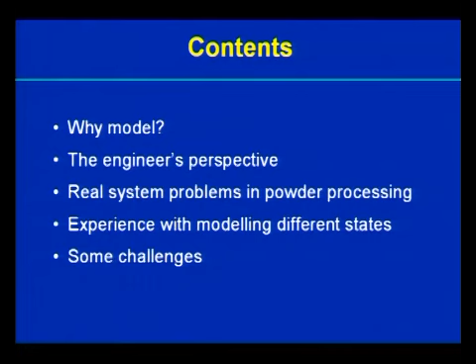Right. Contents of my presentation: first I'll talk about why we want to model, what the engineer's perspective is on that, some real system problems in industrial powder processing, which is what I'm talking about, some experience we have with modeling different states, some challenges, and a special offer at the end.

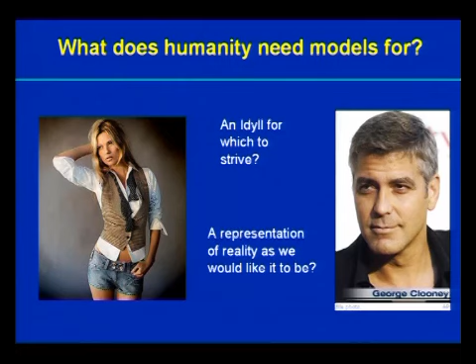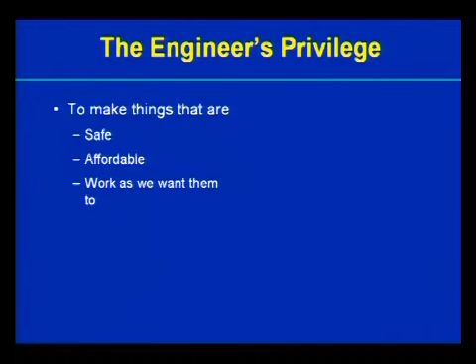So, what does humanity need models for? Maybe there are all sorts of reasons why we might want models. Is it an idyll for which to strive? Is it maybe a representation of reality as we would like it to be, or maybe just as we can understand it? The engineer's privilege, of course, is to make things.

And we want to make things that are safe, things that are affordable, and things that work as we want them to work. The other side of that is if our designs don't work, we're likely to lose our reputation and with it our livelihood. And if people have paid money and built things that don't work to our designs, we may be sued. And if those things fall on people's heads, we may go to prison. So we have a particular perspective on models.

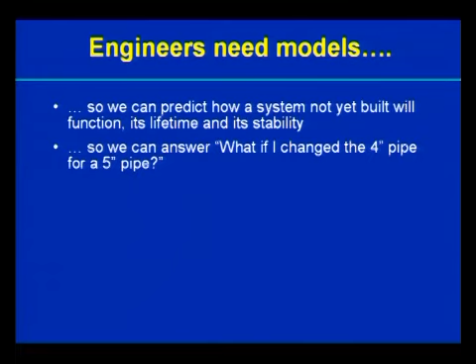Engineers need models so that we can predict how a system will work when we are going to build it: its function, its lifetime, its stability, but also to answer those what-if questions. What if I change this size pipe for that size pipe? What if I make the hopper angle this instead of this? We need models to answer those kinds of questions.

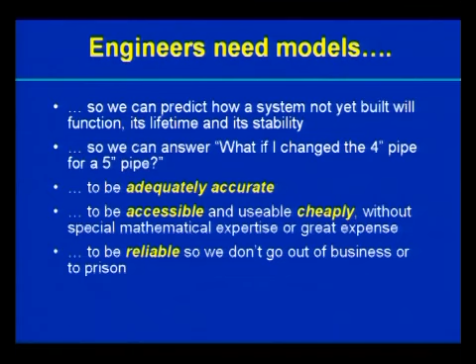We need our models to be adequately accurate, not necessarily absolutely, but to get us to the right solution. We need them to be accessible, usable cheaply, without special mathematical expertise or great expense. Engineers are not frightened of a bit of mathematics. We can cope with a few differential equations, but once we start to see curly D's, we start to break out in a sweat.

We need our models to be reliable for obvious reasons, and we also want our models to be validated to give us some confidence. Generally, our order of preference in using models: analytical models based on schoolroom physics is ideal. We can understand those, we can use them, we're confident about them. Can't solve many problems with those, though, unfortunately.

So in many cases, we use an analytical model that's based on a simplified physical model, and then we empirically calibrate it. An awful lot of engineering is based on this approach - the Fanning or Darcy expression for friction factors from the Moody diagram. And if we have to, we'll do material characterization tests to get those calibrations.

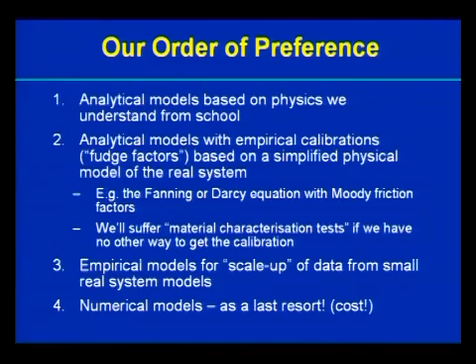If we can't do that, then we may be stuck with, as we are in many situations, empirical models for scale-up. We do a small-scale experiment, and then we have some sort of scaling rules to predict what's going to happen in the real system. Numerical models, by and large, are a last resort for us because of the cost and time scale involved. We'll only use them if there's nothing else, or if they give us a significant advantage to do something we can't do any other way, such as finite element modeling, which is widely accepted now.

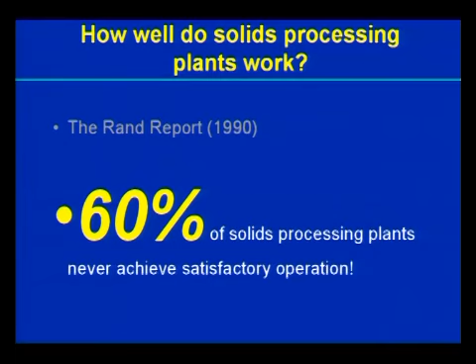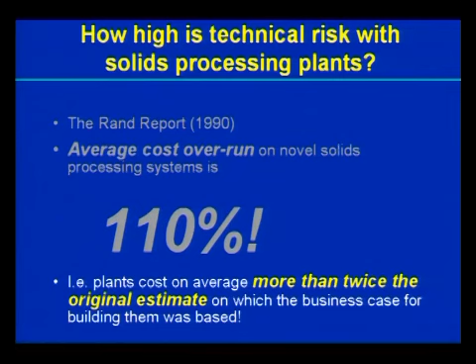Just turning back to what one or two other speakers have mentioned, how well do solids processing plants work? A report done a few years ago showed that 60% of solids processing systems never achieve the throughput and performance they're supposed to. If you look at the technical risk and the cost overruns, the average cost overrun is over 100%. So these systems cost more than twice the estimate on which the business case for investment was made. That's a pretty bad track record, I think you'll agree.

To be fair, quite a lot of that is because many people in the industry don't use the available models that exist. But it's also partly because our models aren't fully adequate in many instances. The kinds of things we finish up with are structural failures on silos, failures to discharge, and the inevitable outbreak of hammer rash, as it's popularly known, on hoppers and silos. This was taken on a pharmaceutical plant, and this piece of stainless steel pipe, just out of shot, has a number written on it - it's entered in the plant inventory log as the official piece of stainless steel pipe with which to beat the hopper.

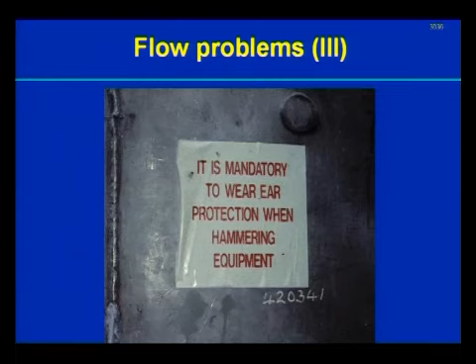Material going through there is worth more than £1,000 a kilo. That was on the same plant. It was supposed to be a 24-hour-a-day plant, but they couldn't work through the night because the noise of people hammering silos kept residents awake on the adjacent housing estate.

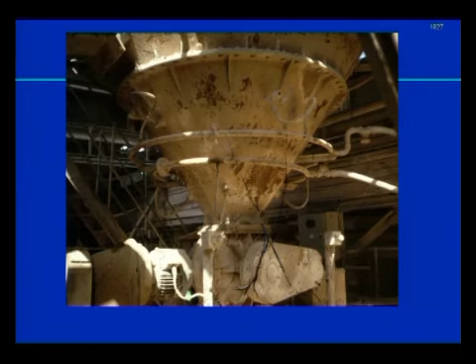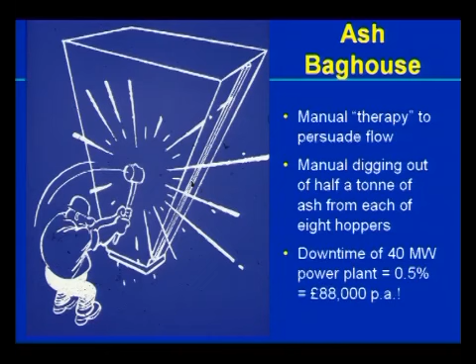And of course, people, apart from hammering, use aeration and all sorts of other things. On this hopper, they've even put valves up on the top, so when they get a blockage, they can get somebody round with an air lance to give the hopper an enema, to get it moving.

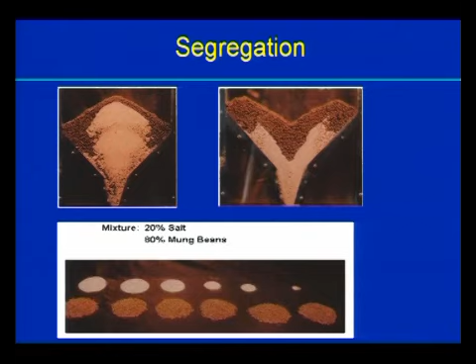There's an example: one baghouse on a small power station. Cleaning costs them £88,000 a year in downtime.

Segregation, another common problem. You put material in a hopper, and when you discharge it, it comes out no longer mixed. Caking is another problem, material going hard. So that's just a few basic problems, by no means a thorough tour, but just a few illustrations.

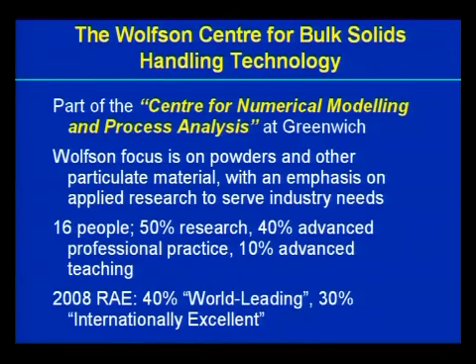Just a little bit about the Wolfson Centre, so you get an idea of where we're coming from. The key point is that within my team we occupy a fairly privileged position, in that if you divide up our man hours, we spend about 50% of our time on research and most of the rest on advanced professional practice. So we get a lot of time to use the models we're developing and also models from other people. That's quite a privileged position which we appreciate.

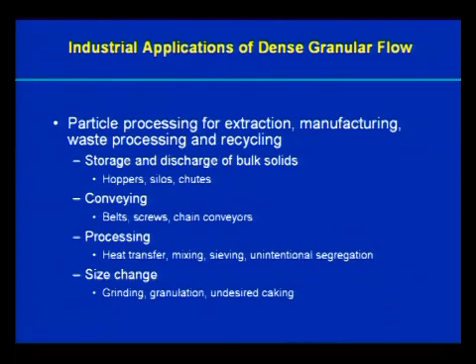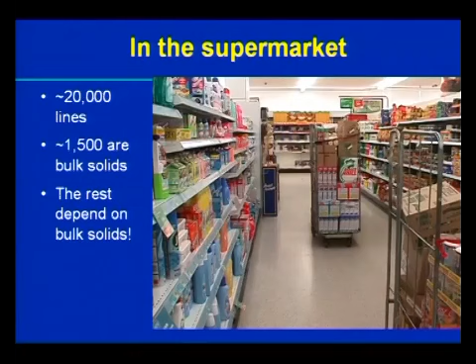Now, a few industrial applications of dense granular flow. Particle processing for extraction, manufacturing, and all the rest of it - storage, conveying, processing, mixing, size change, all of these kinds of things. A lot of people have talked about the importance of bulk solids, particulates, or granular materials, and the name tends to depend on what discipline you're working in, but the implication is the same.

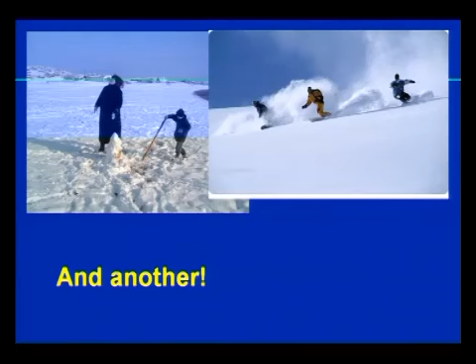So I'm going to do a quick tour of some techniques we've had experience using for predicting dense and intermediate granular flows. Although this conference is supposedly about dense granular flow, we've actually talked much more, I think, about the intermediate - and in many ways that's where there are more challenges.

Now, I'm going to talk about a lot of different techniques. Because of time, I'm not able to reference or credit all of them. Some of these techniques are what we've developed in our group, some we've developed in collaboration with other groups, and some we've just brought in from others as well. But if anybody wants references, I can give you piles of them.

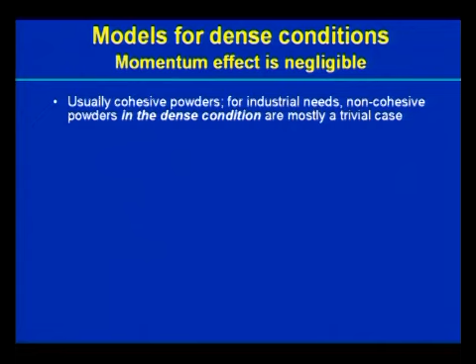So, models for dense conditions, where obviously, as we've heard, momentum effect is negligible. In most industrial applications, we're talking here of cohesive powders. Non-cohesive powders in the dense condition, industrially, is mostly a trivial case - in other conditions not so, but in the dense condition it's non-fluidized cohesive powders, and it's a statics-driven problem.

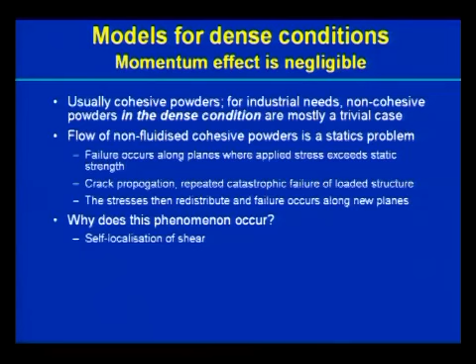Failure occurs along planes where applied stress exceeds static strength - crack propagation, repeated catastrophic failure of a loaded structure, if you like. The stresses redistribute, and failure occurs along new planes. Self-localization of shear, as we've heard a lot about, is a big part of this, and that's one of the reasons why that happens. It's not the only reason, but it's a big contributor.

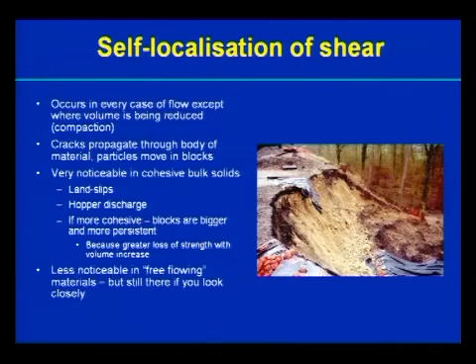And of course, this is a two-stage process. A cohesive structure is created by material being put, say, into a hopper. Then when you open the valve at the bottom, you hopefully get failure because of the change in load conditions. So we need to always be aware that flow of cohesive powders in the dense state is a two-stage process. Self-localization of shear - you see this everywhere in the flow of cohesive materials like this.

Techniques to solve these dense, slow flow problems: if you can describe the geometry mathematically, such as flow patterns in hoppers, stability of embankments, and a number of other things, then you can do very well with analytical models based on statics. One advantage is that you can feed in fairly complex constitutive models for plasticity and account for cohesion, friction, volume change, and other factors.

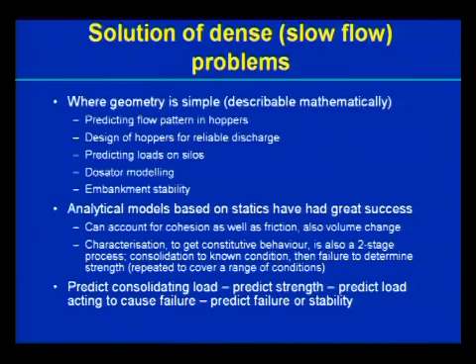But you have to characterize the powder to get that constitutive behavior, and that's a two-stage process: you consolidate the powder, then fail it. That's what we do with shear cells. You predict the consolidating load in the system, the strength that lends to the system, the load acting to cause failure, and then you can predict failure or stability.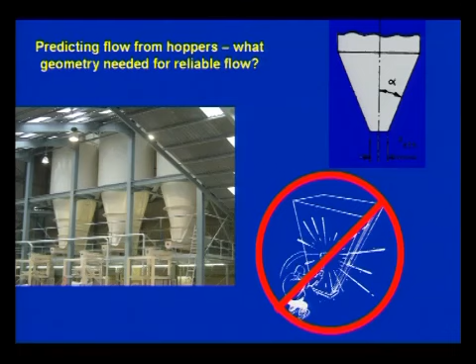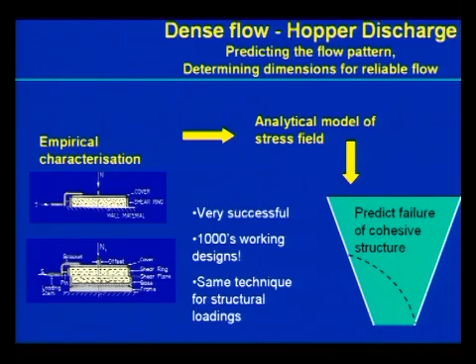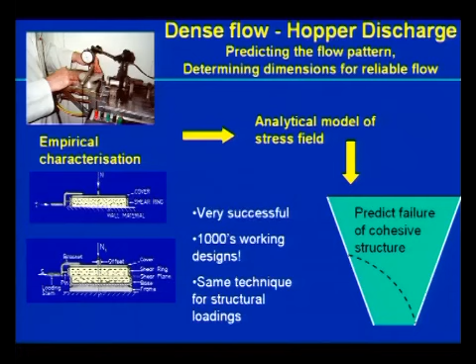What geometry do you need in a hopper to avoid this? These are some hoppers for cohesive clay that we've designed. No hammer rash on them, notice, because they've been designed using well-established models predicting the flow pattern inside hoppers. So the principle is: empirical characterization, analytical model, predict stability or failure. Very successful—thousands of working designs. It also works for structural loadings on bins and other constraining walls.

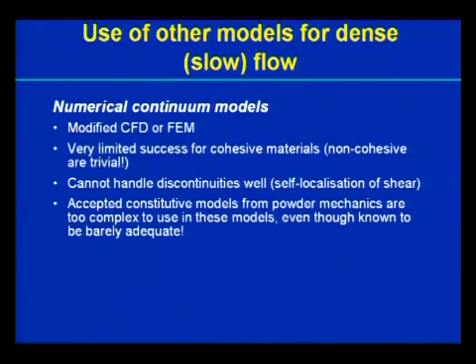Other models for dense or slow flow we've tried are numerical continuum models, modified CFD or FEM type models. Broadly, for cohesive materials, these have had limited success in quantitative predictions. One main problem is they don't deal well with the severe self-localization of shear and hence discontinuities—that's a real problem. The other issue is our constitutive physics, which we understand reasonably well, is too complicated to put into these models; they become too hard to solve.

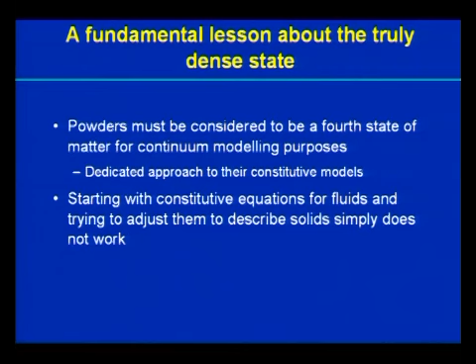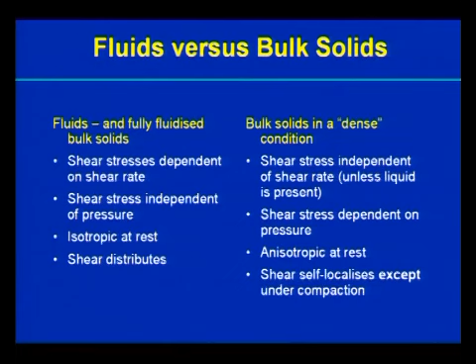The simpler constitutive models just are not sophisticated enough. For example, you can't easily predict core flow channel boundaries, a problem we've been looking at for a number of years. So here are a couple of fundamental lessons about the truly dense state: you've got to consider powders as a state of matter in itself, separate from liquid, solid, or gas, and you've got to have a dedicated approach to their constitutive models. If you try to start with a system based on modelling liquids and frig it to work, it just doesn't.

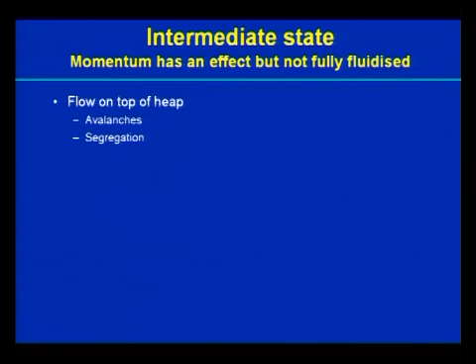This is because of the comparison between the properties of fluids or fluidized bulk solids and the properties of bulk solids in a dense condition.

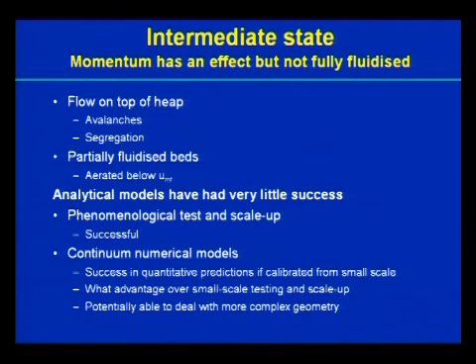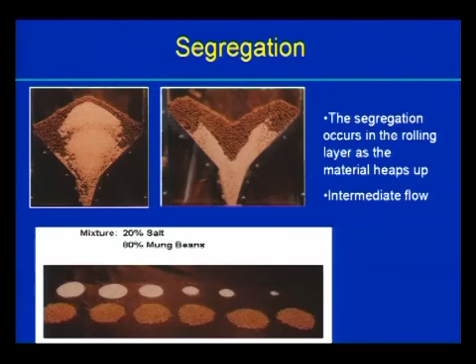Let's look briefly at the intermediate state where momentum has an effect but the material is not fully fluidized—flow on top of a heap as you make it, avalanches, segregation, partially fluidized beds. Analytical models: not much success with these. Phenomenological test and scale-up is where we're generally at, and that's broadly pretty successful. Continuum numerical models: some success if you calibrate them from the small scale, but then what's the advantage over small-scale testing and scale-up?

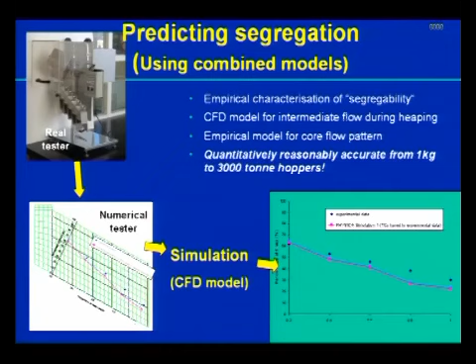Segregation in the intermediate flow regime: predicting segregation again using these combined models, a result of a collaboration between our group and the group at Surrey. A segregation tester actually measures segregation in a powder as it's handled, a numerical version of that reverse-engineers it to extract the transport coefficients, and then those coefficients are used to predict what's going to happen in a full-scale silo. Works very well.

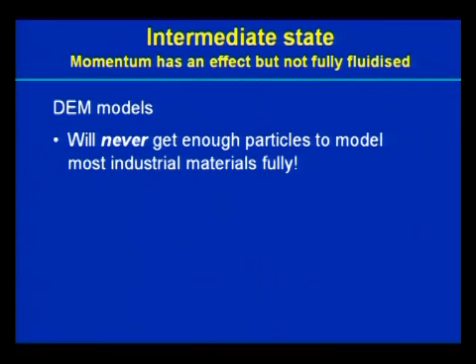Intermediate states, where momentum has an effect but it's not fully fluidized: DEM models—basically you'll never get enough particles because of the dispersion and the fact that materials are polydisperse. If you've got a wide distribution of sizes, like in most real materials, say a 100-to-1 size range between the 5th and 95th percentile, that means the mass ratio between those particles is a million to one. So if you want 1,000 of the large particles, you'd need a billion of the small ones, plus all the ones in the middle.

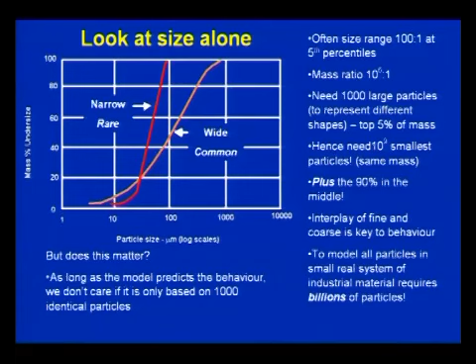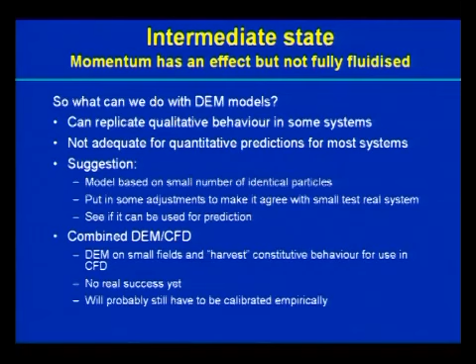It's just not on. But actually, as engineers, we don't care about physical rigor. If the model predicts the behavior properly—even if it's only based on 1,000 identical particles but calibrated somehow—that's okay. So a simpler model with calibration, we're happy with, though we haven't been able to get there yet. Likewise, combining DEM and CFD, running DEM on a small field to harvest constitutive behavior—no real success yet, but we might get there one day.

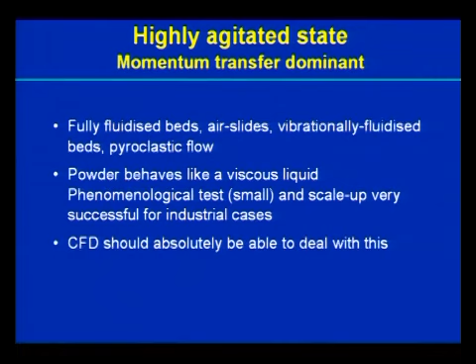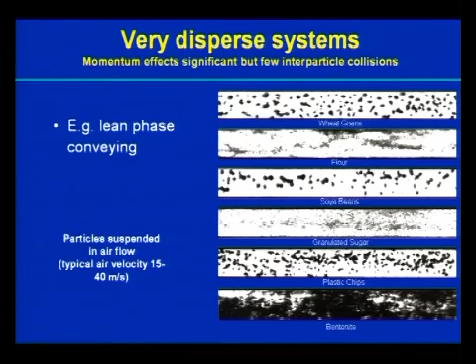Looking at the highly agitated state where momentum transfer is dominant, such as fluidized beds, powder behaves like a viscous liquid, so you'd expect CFD should deal with that extremely well—not sure about DEM there. Very dispersed systems, such as lean phase conveying: these are pictures taken in a sight glass in our lab, and you can see the kind of dispersity you've got there.

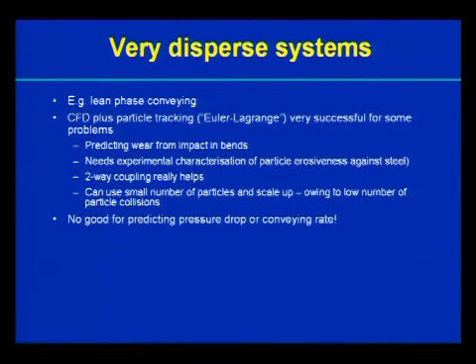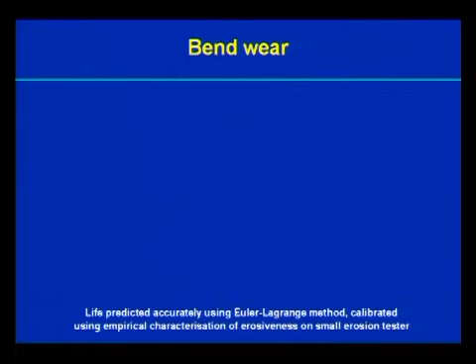CFD and particle tracking, an Euler-Lagrange type approach, has worked very well for some problems, like predicting wear on the inside of bends. But we've never found it to be any good for predicting pressure drop or conveying rate. The only way to do that is to do a test at a small industrial scale and scale up.

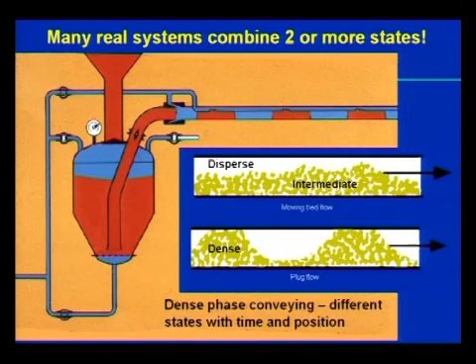So there's bend wear. Dense phase conveying systems illustrate a problem with many real systems: they combine more than one state. In a dense phase system where you've got slug flow, you may have intermediate and dispersed phase. You may have dense conditions in slugs, which then at bends rearrange in a fluid-like condition. Very difficult to try and tie all those models together.

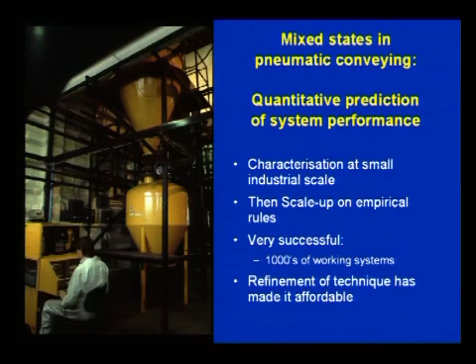So there's a test rig that we use to test at the small industrial scale. What we've done is to try and refine the technique to make the characterization testing as cheap and as quick as reasonably possible. So mixed state systems, as I said.

Crossover is too expensive to model. Here's a few challenges, some of which might be doable. I've tried to keep out of these the things that I think are probably too hard.

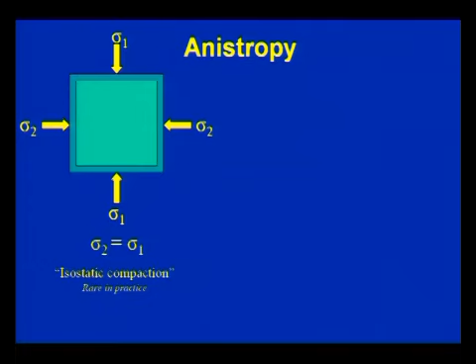Anisotropy in powders. Take a block of powder, apply a stress all the way round. If sigma 1 equals sigma 2, what we call isostatic compaction, you will get the same strength in all directions. If you cut that on any plane, you get the same strength.

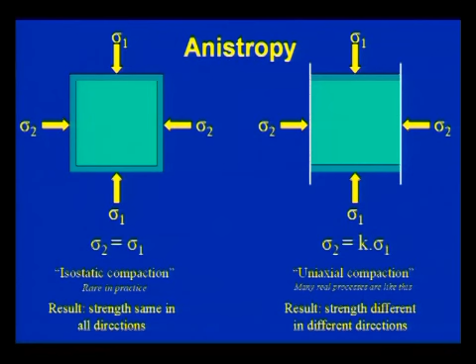But actually, that's rare in practice. That's not what generally happens. Most real processes, powder tends to be constrained. What you get is something more like the uniaxial compaction, something like Oscar was showing you on Tuesday with his K-meter. The problem is if you cut that at different angles, you get different strengths.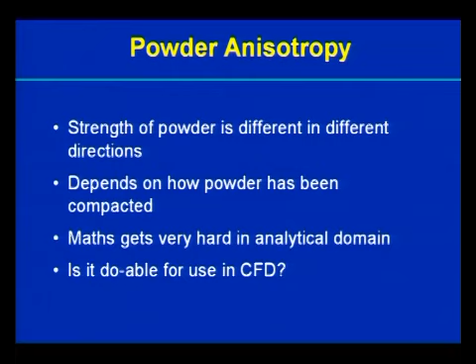And we've got no real way of even describing that, let alone being able to use it adequately. So powder anisotropy depends on how the powder's been compacted. The maths get hard. Would we be able to develop something in the way of a constitutive framework that would capture that we could use in CFD?

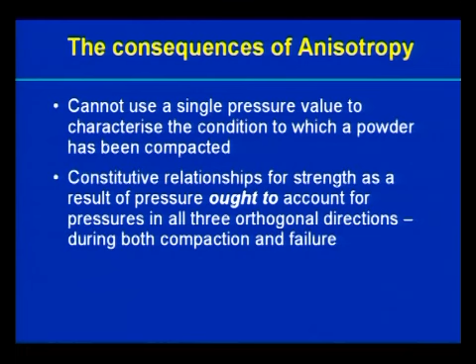Until we can, we're not going to be able to use CFD effectively for the really dense phase, in my view. This means you cannot use a single pressure value to characterize the condition to which a powder's been compacted. You've got to account for pressures in different directions, and of course powder stores its history. This is another way in which powder stores its history.

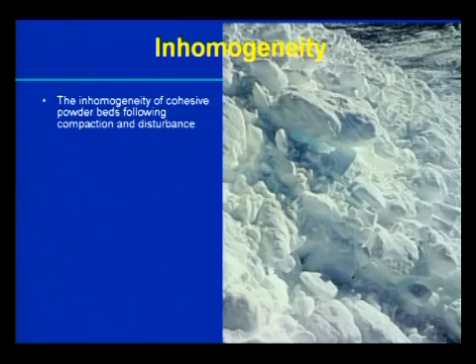In homogeneity, when you've got cohesive powders, this is the result of an avalanche. Lots of little snow particles, they've settled, they've become compacted, then the bed has moved. And you've got here a lot of large agglomerates of small particles.

But these agglomerates, they can be persistent, but they're not fully stable. They can break up, they can reform. And being able to deal with this is a real challenge.

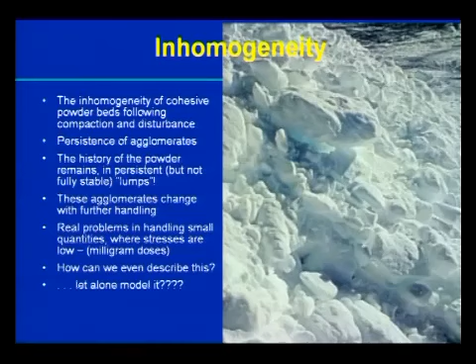Particularly where you're trying to dose very small quantities of powder, this becomes a serious problem because the stresses are not enough to break the agglomerates as you're trying to handle the powders. At the moment, we can't even describe it, let alone model it. So there's a challenge.

Particles with extreme shapes, biomass, waste materials, all these kind of things. They sit on top of each other, they bend over, they nest, they interlock, you apply pressure and they get stronger.

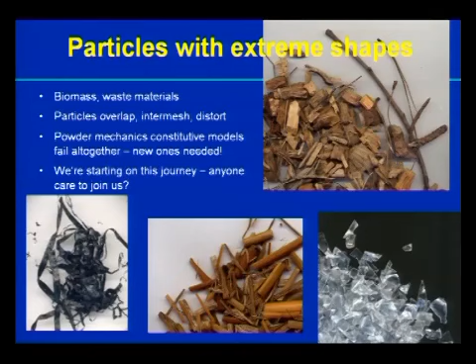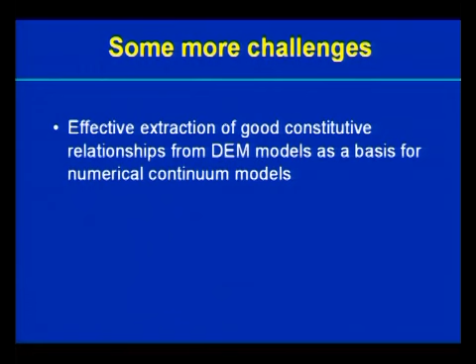Traditional powder mechanics constitutive models just fail completely with these powders. We've got no way of dealing with these at the moment. We're actually starting on this journey this month with a new research project. And if anybody's interested in talking to us and seeing if we can learn anything from each other, we'd be interested to talk. A few more challenges very briefly.

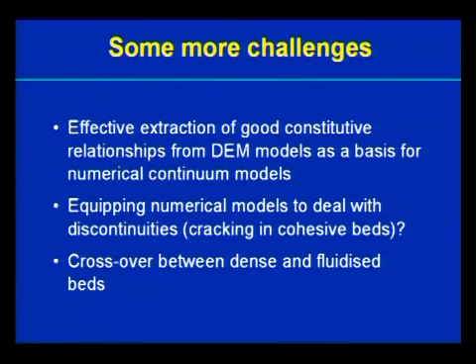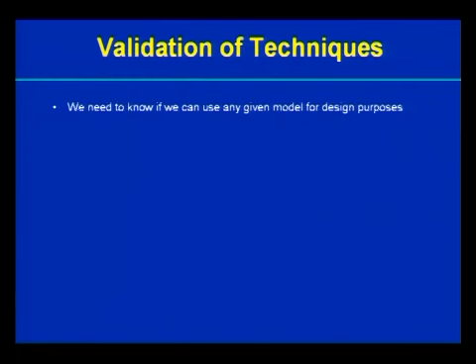I mentioned effective extraction of good constitutive relationships from DEM models. This business of equipping continuum numerical models to deal with discontinuities, can it be done? I don't know. You probably know better than I do if that's a possibility or if it's completely out of the question. And this crossover between dense and fluidized beds.

Finally, just to touch on validation of techniques, we need to know if we can use a model for design purposes as engineers. The test of usefulness is to set up a model and calibrate it so it models a small system accurately. That's our characterization.

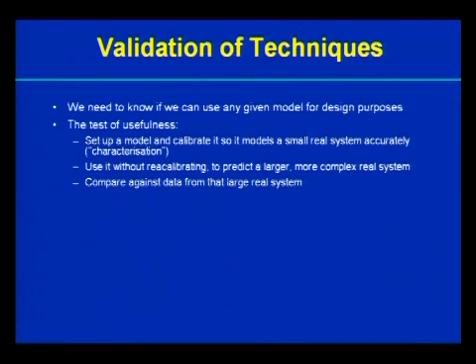Then we use it without recalibrating. And will it predict accurately a larger, more complex system? If we compare it against data from that large real system, that's the test of usefulness.

And the measure of success, this comes back to what we were discussing the other day in Roger's session, is does it predict the aspects of behavior that we care about? It may not predict accurately some aspects of behavior, but maybe we don't care about those.

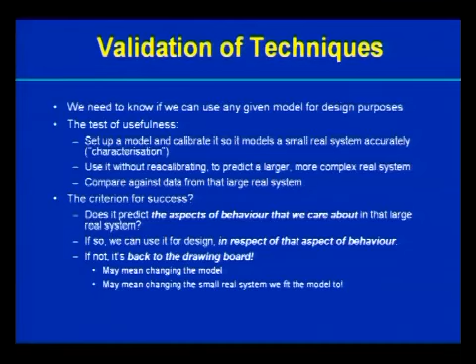If it does, we can use it for design on that aspect of behavior only. If not, it's back to the drawing board. It may mean changing the model, or changing the small real system, in other words, the characterization test. Perhaps we didn't do the right small experiment. Maybe there's nothing wrong with the model.

So I'm not going to offer any conclusions except to say there's a whole variety of different techniques there, with different levels of success - a personal view. Horses for courses, I think, is the lesson. Different types of conditions, different types of boundaries, these sort of things determine what types of model are successful for us.

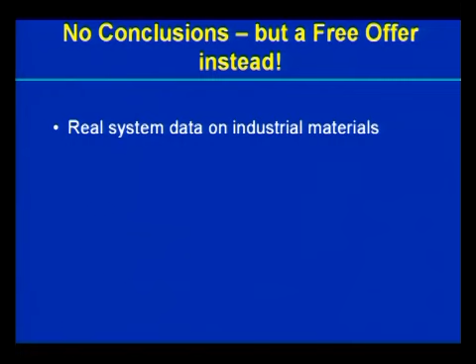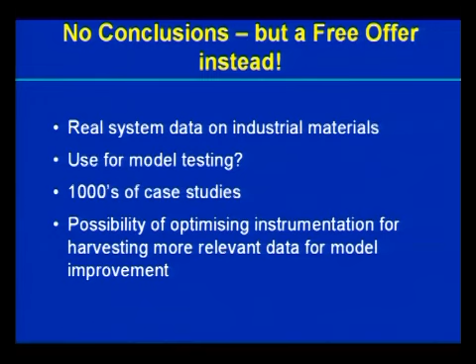Because of the amount of work we do at Wolfson over the last 30 years we've been doing this, we've got masses of real system data on industrial materials. If anybody wants to use it for model testing, they'd be very welcome - thousands of case studies we've got. And maybe, because we continue to do these all the time, if anybody wants to harvest information in a particular way, perhaps we could help to generate it for their model improvement.

And I'll finish at that point, and then you can all throw things at me. Thank you very much.